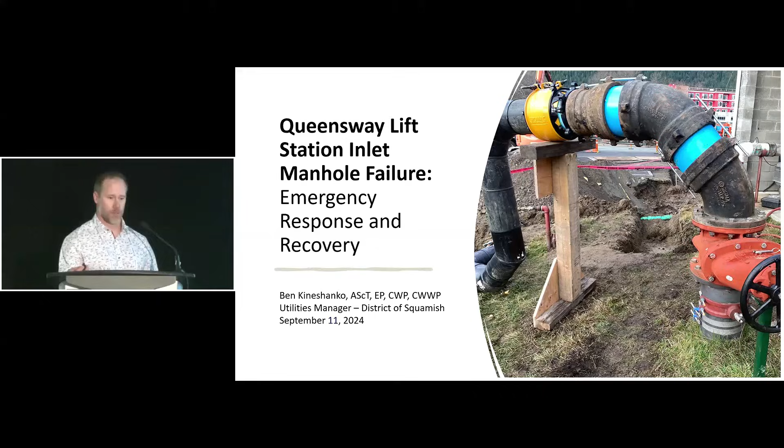So a little about my community first. The District of Squamish was built on forestry. Historically, Woodfibre pulp and paper was one of the major employers in town. It operated for 94 years. And during its heyday, whole families lived, worked, and were partially educated on site. I've met people in town that were actually born at the Woodfibre site. When it closed, there was pretty severe economic depression in the 80s, 90s, and early 2000s, owing to the boom and bust nature of forestry. And the mill finally shut down in 2006.

Since the Olympics, Squamish has kind of been reborn as a world-class seaside mountain town, known worldwide as a destination adventure community. As such, the district's undergone significant growth in the past decade, and anybody who's driven to Whistler in the past 10 years should have noticed. And that's expected to continue. We're the subject of several up-and-coming high-profile developments, including the Woodfibre LNG facility that's just begun construction. There's also a resort proposed on Brohm Ridge, just below Diamond Head. That one's kind of up in the air now, but it's been hanging out there for a lot of years. And then a new one lately is a Capilano suspension bridge style attraction, actually quite near our water source.

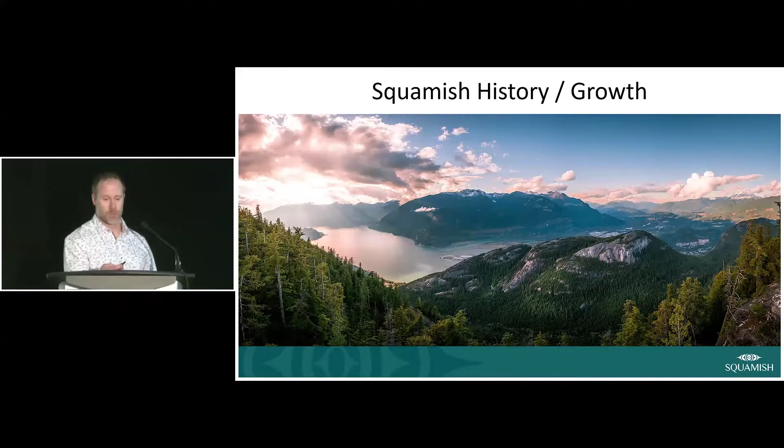And then additionally, there's actually a housing development and landlocked surf resort proposed, and I believe approved, for Britannia Beach as well. So as with many other communities in the province, growth is straining the capacity of our aging infrastructure. We didn't have a lot of money the last 50 years to invest in infrastructure renewal, so it's really starting to show, in my opinion. In this case, we were the victim of severe H2S corrosion and rapid community growth, creating a perfect storm.

So a little bit more about Squamish. In 2023, we were around 25,000. It really depends who you ask, and I find the stats are changing year to year. I'd say we're anywhere between 25 and 30,000 now, based on illegal suites and people living out of vans and everything else that goes on in town. We're a Class 3 water supply and distribution facility, Class 3 wastewater collection. We've got 27 lift stations, so one per probably 1,000 people, which is pretty high numbers in my estimation. It's a lot of infrastructure to maintain. It's owing to the fact that the community is really spread out and quite flat in certain areas, despite the fact that we've got mountains all around us.

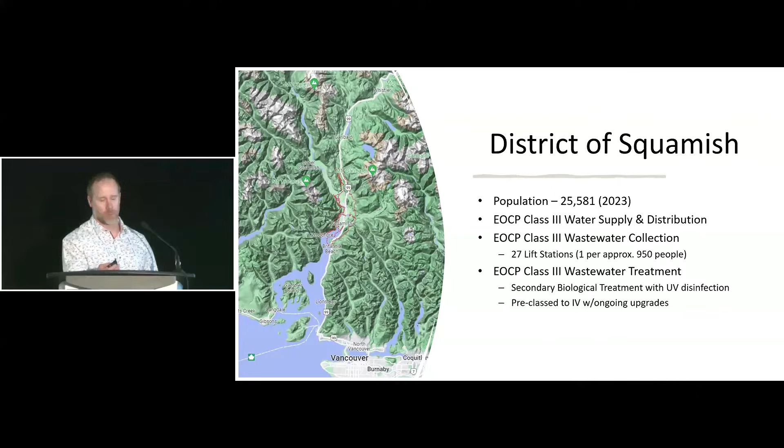And then we're a Class 3 EOCP treatment facility, secondary biological treatment with UV disinfection. We have an ongoing $20 million upgrade right now to add a circular new combined treatment unit and turn some old tanks into primary clarifiers. So we will be a Class 4 facility probably in another year or two. So another challenge to overcome.

Speaking a little bit about the Queensway lift station, it's the largest lift station in the district. All of the flow from the Valleycliffe area and then everything south of the Mamquam River, including downtown Squamish, flows either to the central lift station to be pumped to Queensway or to Queensway directly by gravity.

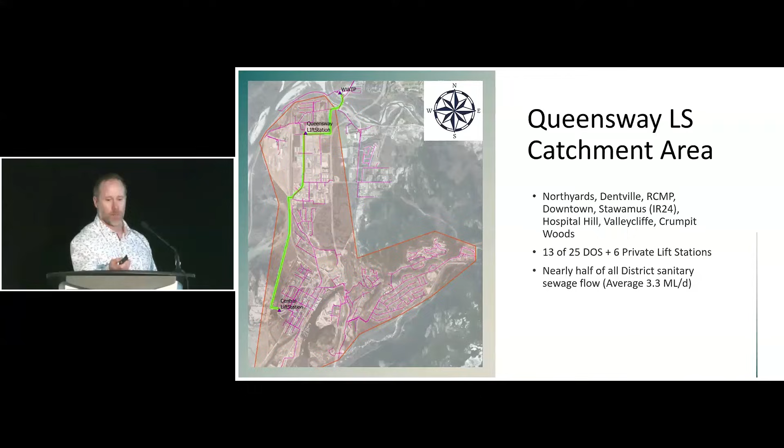So approximately a third to a half of our average dry weather flow flows through this system. And this manhole, it was kind of the linchpin to it all. So it was a single 1050 concrete unlined manhole receiving force main flow and gravity flow right before it entered the lift station.

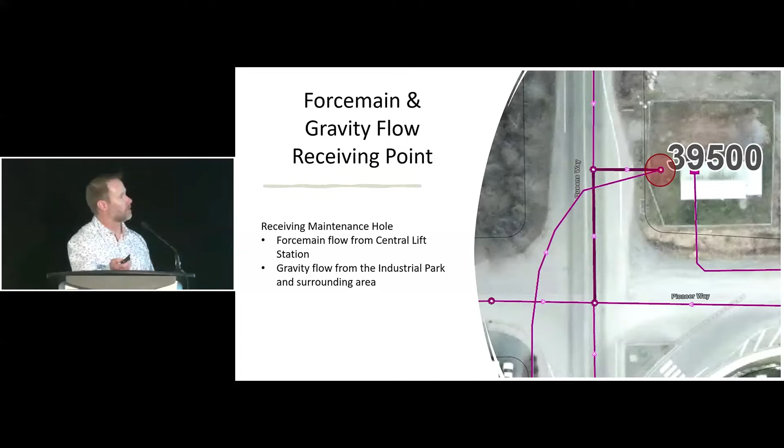And I think it was one of those things where we had an old treatment plant downtown. It was decommissioned, and the easy solution was to pipe it north. So they plugged a HDPE force main into an existing manhole without doing any further upgrades to save cost. And that was done in 2006. So in a period of less than 20 years, we saw a significant failure because of that.

A little bit of background, we kind of tweaked that there might be a problem in 2016. We did an odor audit on the community. We kind of looked at all of our lift stations, our wastewater treatment plant, where odor impacts were, and it was through an organization called Odotech. I think they've since changed names, but they were the ones that kind of educated us and informed us that we had H2S problems in certain areas.

After that came a sanitary master plan, and out of that master plan, a lift station condition assessment report that identified quite a few issues around our collection system, Queensway being one of the major lift stations that it called out. And then, as we all know, we had a pandemic in there. And there were a lot of impacts, and I think we're still feeling the effects of supply chain delays, human resource challenges, all that fun stuff, and then the cost increases that went along with it. And then in 2021, kind of during the pandemic, we were working on replacement and repair design and construction plans for that lift station.

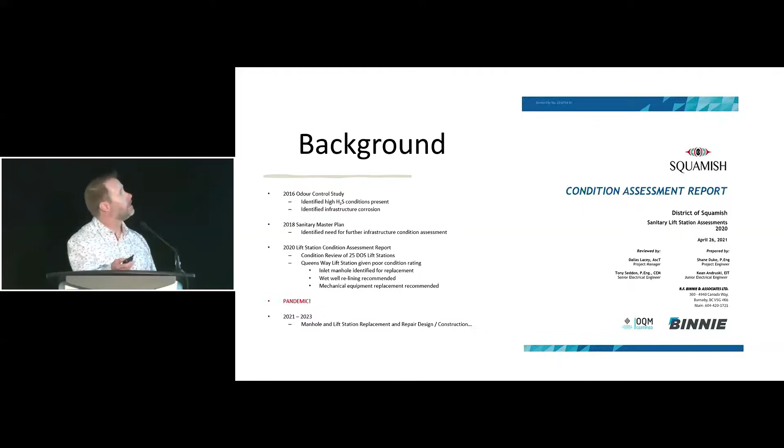Just another little bit on the timeline. So a tender went out in 2021, and it had to be canceled because the tender results we got back during that time when inflation was going crazy were double what we budgeted. So it was rebudgeted for the following year, put out, had to be canceled for the same reason. The cost to do the project doubled twice in 2 years. So we thought we had it licked, and then we didn't.

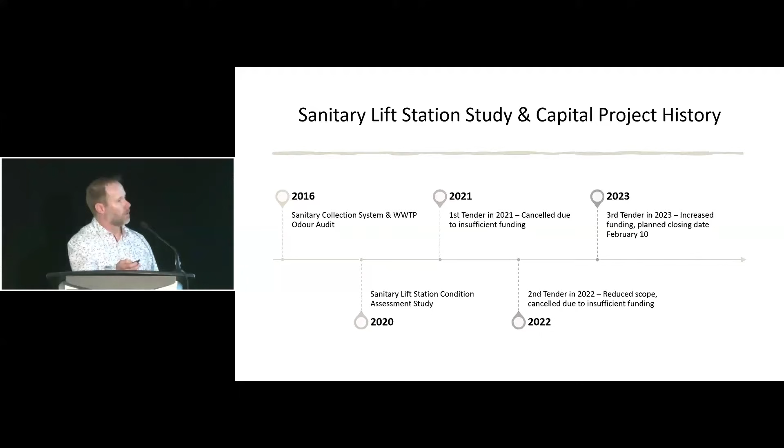And then in 2023, it was tendered a third time with increased funding, and the closing date, just keep an eye on that date, was February 10th. We would have been signing a contractor on to do some replacement and upgrade works. But on January 9th, this happened. So it was a Saturday morning, and I got a call from our utility supervisor saying, oh, there's a sinkhole. What do you mean there's a sinkhole? Well, this is what we found.

So we immediately engaged a geotechnical engineer to help us keep crews safe, working around the ever-changing conditions, because it was kind of sloughing as time went. Obviously, we've got a large part of the community's flow going through this manhole with no bypass. So we just kind of had to keep on keeping on. Immediately, we had kind of hoped to be able to fill the holes that were created.

Essentially, what happened is at the bottom of the 6-meter deep manhole, the bottom couple rings started failing. So basically, everything outside of that manhole, the debris, the sand, the cobbles started flowing into our waste stream. And because the groundwater table was really high, it was liquefied soil. So it was flowing rather than ravelling or rolling. So we immediately started plans to install an emergency bypass.

We went about finding and organizing 4 different contractors to install the appropriate piping, valving, hot taps, and to do the vacuum and tanker shuttles that we knew would be needed from downtown so that we could basically shut down long enough to install the bypass. Key goals were to keep staff safe, support the manhole, slow down or stop the leak, prevent complete failure, and construct a temporary bypass in case it did fail.

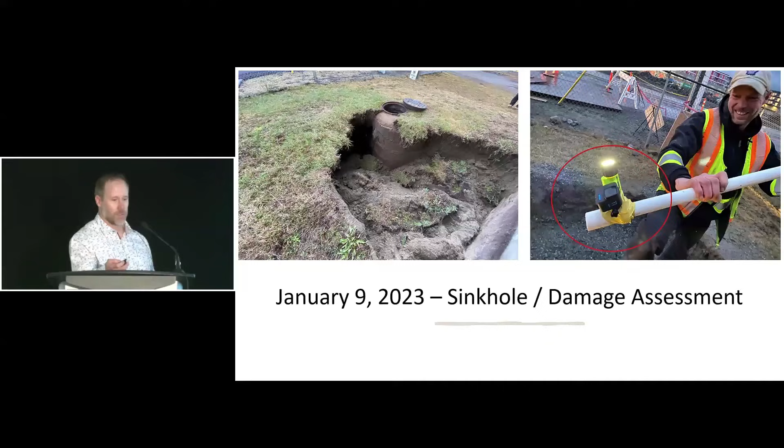In the one picture there, we've got one of our operators holding, we didn't have a camera that we could turn and rotate, so we came up with a Bluetooth GoPro and a Pelican light strapped to a PVC pole as an investigative tool. So then, where are we here? Bypass preparation and planning, right? So we did our locates, our BC One Call, had our hot tap and bypass contractors lined up. We recruited an engineering firm to model what kind of flows we would get through a temporary bypass, so we knew if we could handle wet weather events.

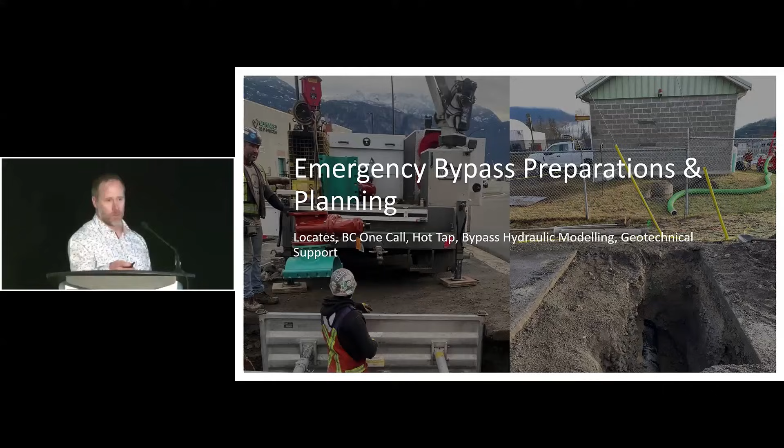And we were all set to go for the evening of January 14th to do this work, hoping to avoid further issues. And then this is what we woke up to the morning of January 14th. So the manhole collapsed catastrophically. The sinkhole got much larger almost immediately.

This is a text from our chief operator, who happened to be getting on a flight to Mexico that morning. His words of wisdom were, you have 3 hours, referencing the time we had to respond and come up with a solution before all of downtown Squamish was fully surcharged with sewage, a very flat, shallow system that could impact thousands of residents. So we didn't have a whole lot of time to respond.

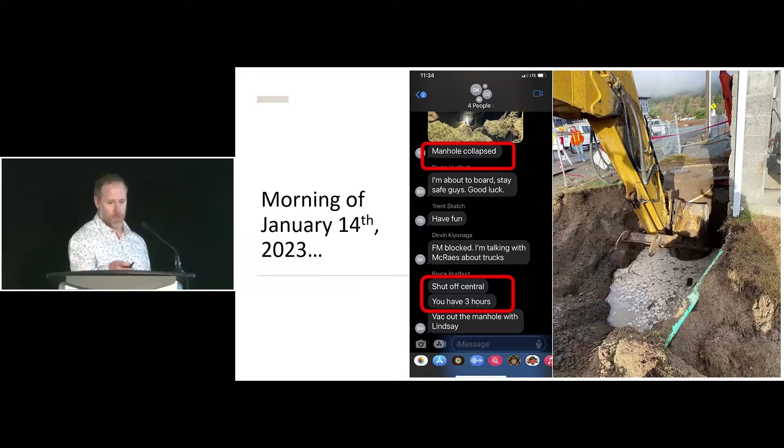The photo here is the excavator bucket being used to prop up the manhole to keep it from falling over entirely.

By the evening, this is what it looked like. The manhole did ultimately fail, about 14 hours before we were scheduled to install an emergency bypass. Truckloads of liquefied sand and gravel flowed into the lift station. We were still amazingly able to convey flow through the open ditch into the lift station and onto the wastewater treatment plant for a short period of time. Of course, it happened during the highest flow period of the day, as you'd expect, and all of downtown was effectively cut off from the wastewater treatment plant.

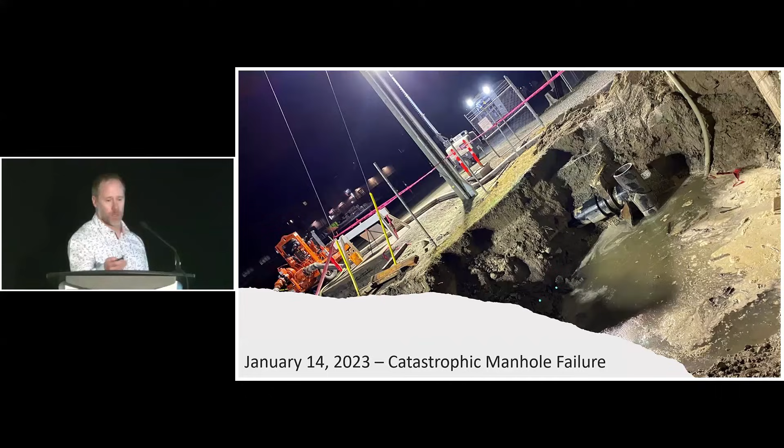The photo here illustrates the groundwater level at the lift station at the time, well above where the inlet to the wet well is.

Some examples of impacted downstream infrastructure: these are our fine screens at the plant. You can see, next to my millwright friend, some pretty bent up lamellas on those fine screens. Then you've got a picture of the impeller from Queensway lift station, and a photo of the grit and gravel built up in our grit separators at the wastewater treatment plant. It flowed through the lift station pumps, through the force main, right into our influent gallery at the wastewater treatment plant.

That's our largest lift station, we have four 60 horsepower pumps there, and they all got banged up pretty good.

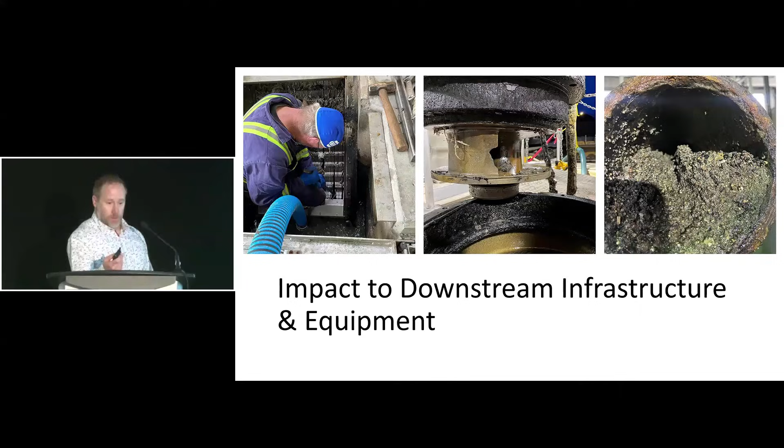So we went into emergency response mode right away. Myself and our Director of Public Works served as incident commander. We had to designate three sites to manage: our lift station downtown, the site where the failure happened, and the wastewater treatment plant. Main priorities for the response were to gain situational awareness, work safely, mobilize staff and contractors to reestablish conveyance and treatment capacity, and manage traffic impacts through the industrial park.

On the plus side, all of our contractors were already scheduled for later that day to respond and build the bypass, and we had a lot of the pre-planning work done for that. One unfortunate thing was, because they were due to work all night, they had stayed up late the night before and were sleeping. So most of them had to be dragged out of bed to respond earlier so we could get started, and they were starting on no sleep.

We called out basically all of the public works staff, including former staff members who were still casuals with us. Some came from Metro Vancouver, some from Whistler, as well as our engineering, environment, communications, emergency management, and senior leadership team. We had lots of help from local contractors. As I said in my presentation to council, we were borrowing and stealing from local contractors, and then I was corrected that we weren't stealing. Council called me on that.

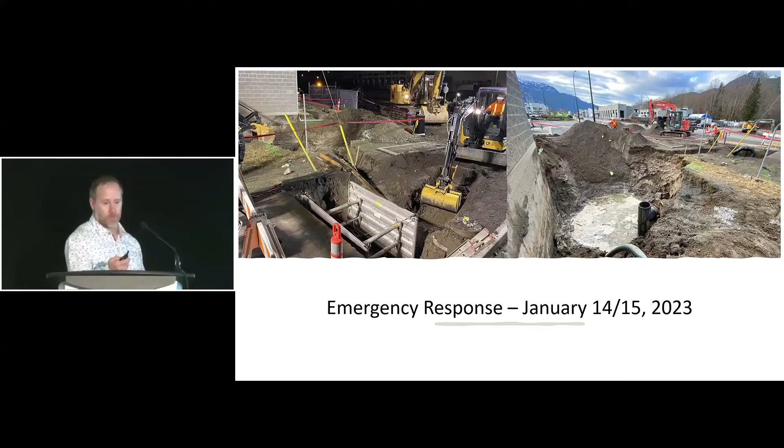The comms team was critical, communicating to the community, dealing with regular situation reports in the field and with contractors every few hours, and sharing contact information. Unfortunately, because of the surcharging downtown, we did have to spill to the environment for about 6 hours before the vacuum trucks could get there and start shuttling flows. We were actually able, because we had a bypass port installed at the central lift station for pump bypassing and pigging, to use the station pumps to discharge to the environment, for better or worse.

If we hadn't done that, literally thousands of homes would have been full of sewage downtown. We did flood a parking garage and one residence, partially I believe. Spill reporting was initiated, and ultimately, I'll skip that.

When the vacuum trucks finally got there, they had to work through the night. In total, we had 11 trucks running nonstop for over 16 hours while we were building the temporary bypass to convey wastewater out of that catchment to the wastewater treatment plant. This was right in the middle of a residential area, so you had trucks running flat out all night, and we had almost no complaints. It was shocking.

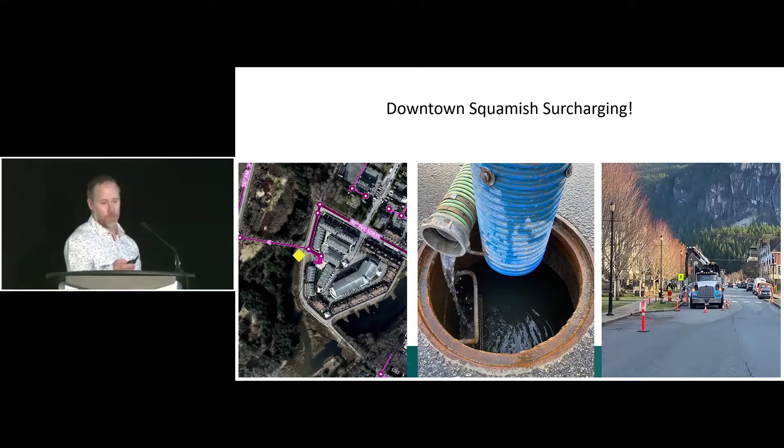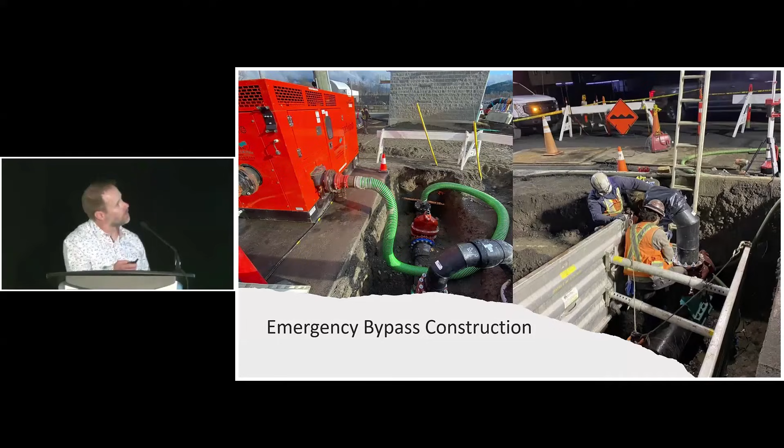In the span of about 24 hours, two bypass systems were installed at the lift station. One for gravity flows in the industrial park area, and then the other one, which is the thing of beauty on the right-hand side there, was what we put together to convey force main flows around the manhole and into an existing bypass port that we had at the lift station.

Obviously not designed for wet weather flow. This happened in January. Had we had big rains after this, we would have been in a world of hurt again, but luckily we had a pretty dry year that year.

Some of the issues obviously required regular staff involvement. For the gravity side of it, we were able to get pumps that came with a float system, and we were actually able to tie them into the hydro off of the building, so we didn't have to run diesel pumps nonstop. It took several weeks to get to that point, but it definitely helped reduce our rental and fuel costs and greenhouse gas emissions.

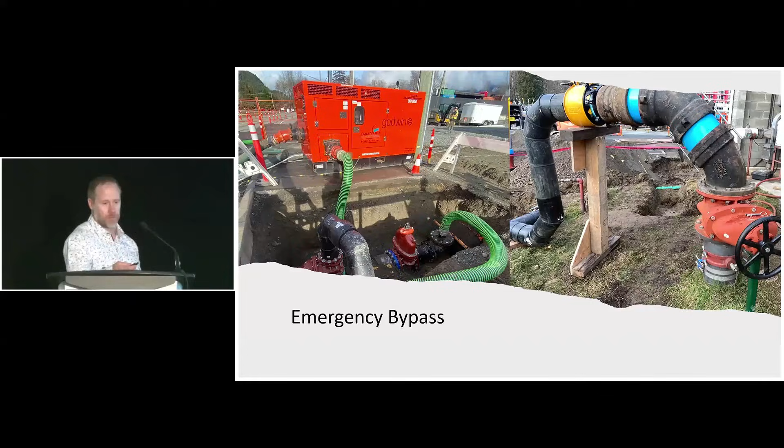Lots of innovative methods and materials were used in construction. I was very proud of staff for what they came up with for that bypass, and to do it in such a short period of time. I believe our director might have even been out there swinging the wrench. Don't tell anybody.

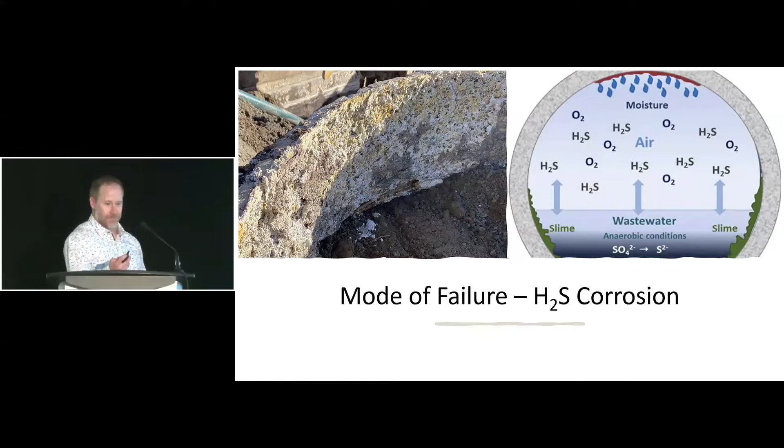Why did all of this happen? Some of you may know, some may not. Hydrogen sulfide production occurs in sewer systems in the absence of oxygen. Bacteria growing in the pipe walls consume oxygen preferentially. Once it's depleted, they switch their metabolic pathway and use sulfur in the form of sulfate or sulfide for respiration. This creates an environment where hydrogen sulfide and sulfuric acid are created as a byproduct of cell respiration.

That obviously attacks and corrodes concrete and metal. Concrete on the bottom of the manhole and below the water table corroded to the point where hydraulic pressure from the outside pushed through the concrete structure and allowed groundwater and sediment to enter.

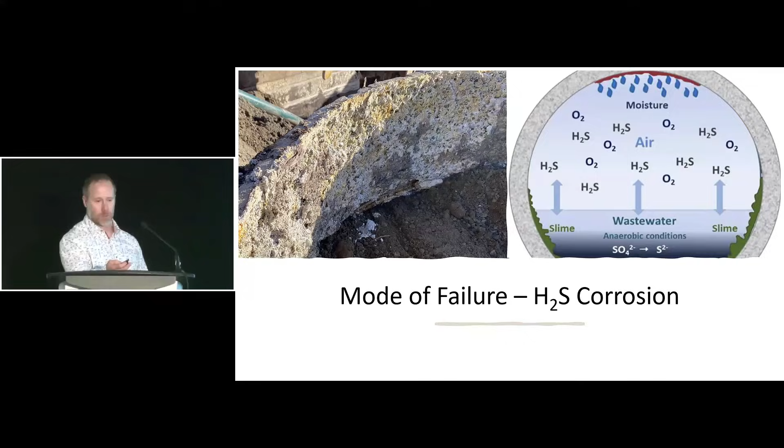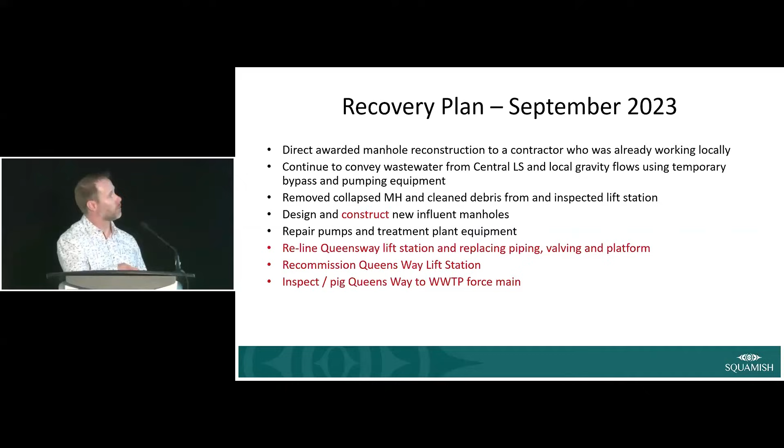Recovery plan - this was the slide I shared in September of last year. As of this time last year, we had designed new influent manholes based on work we had been doing that was in stream for the tender process. We actually ended up going through three engineering consultants before we finally completed the project. We had repaired pumps and treatment plant equipment, but we hadn't done any of the relining, recommissioning, or cleaning of the force main.

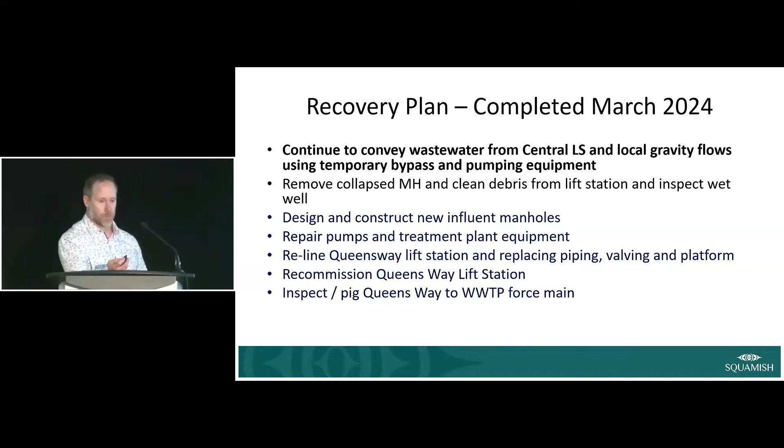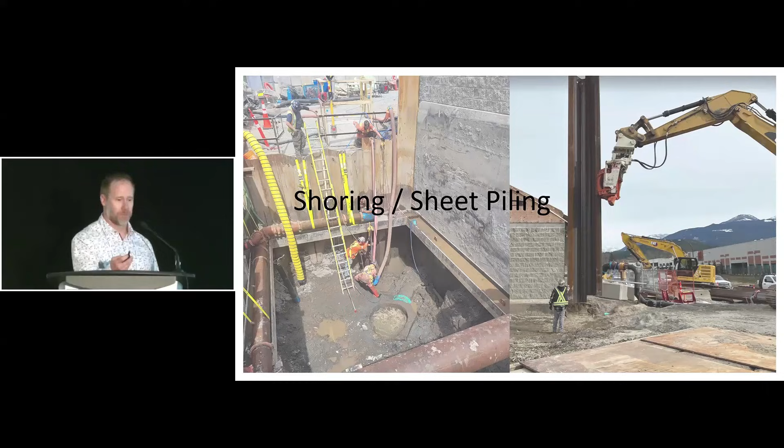And then obviously there's a dewatering setup there as well to keep the groundwater out. And what do you do with all that water? Even in dry weather, the downstream drainage ponds were backing up due to freshet in the Squamish River.

So we had to split flows to an alternate storm catchment. Lots of diesel pumping. There was a washout and failure of some improperly installed storm culverts downstream due to the sustained high flows. We had environmental consultants engaged to monitor ongoing water quality risk.

There were some real challenges because we found there was some iron in the groundwater that we were removing, and had to deal with that. Bi-weekly sampling at various points along the discharge paths, and obviously notifications to the Ministry of Environment and DFO. Through significant investigation, it was determined that the discharge was not deleterious to the environment, but we had to jump through all those hurdles to prove that, right?

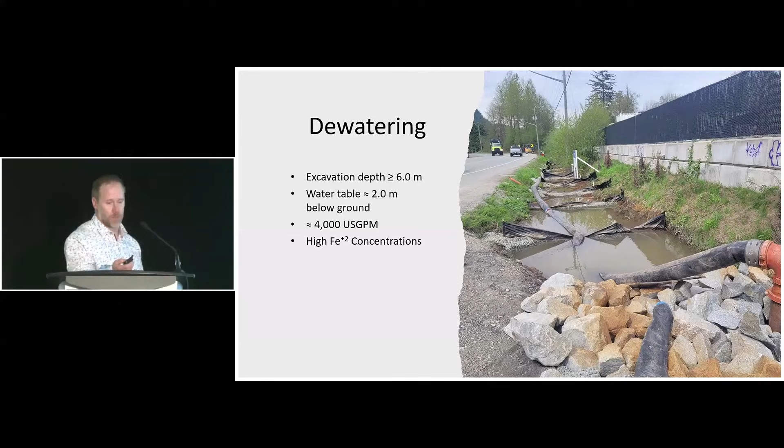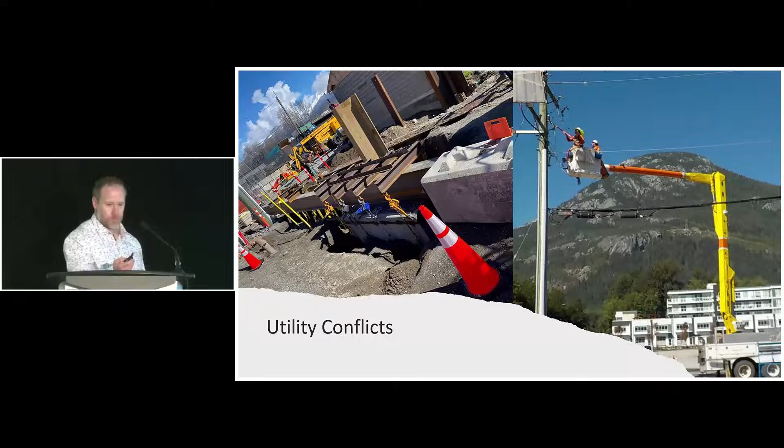Alternate measures, you had to do a 922 for this one, I think. The contractor was required to verify their isolation procedures because they had to make sure the wet well was isolated from the pumping bypass that we had set up.

So they had to add additional valving to make space for the work. We had to do a number of force main shutdowns, and I think in total we redid the bypass 3 times, or certain segments of it 3 times, just to deal with the alternative measures side of it.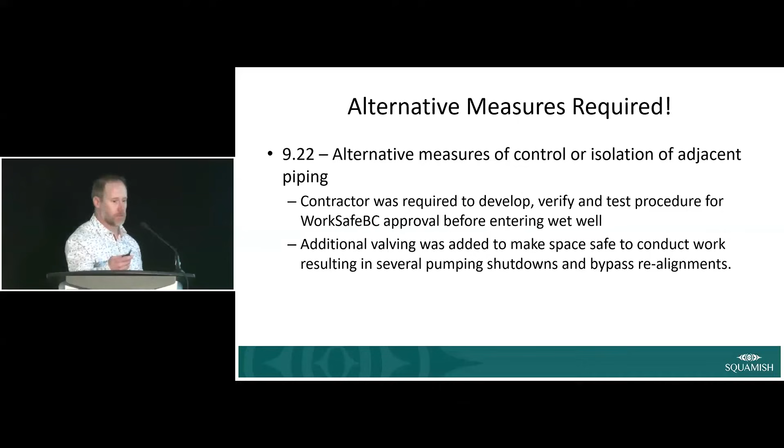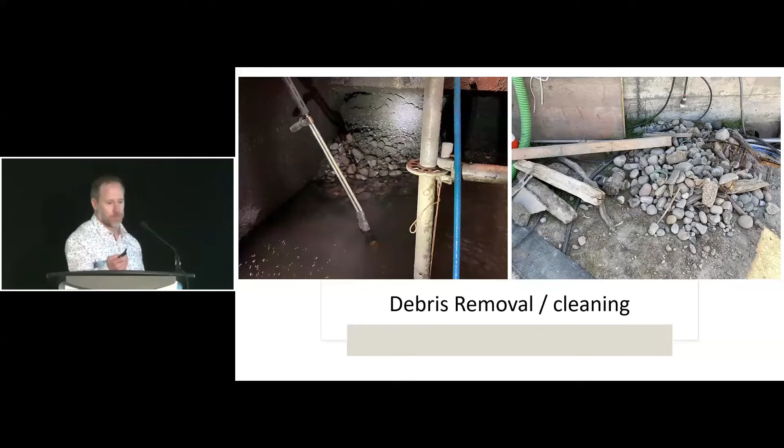This was some of the debris that was inside the lift station. You can see the large, football-sized cobbles that came into the wet well, and some of the debris that was removed. This is what we found inside of the wet well, which wasn't entirely unknown to us. We had done a condition assessment and sort of expected to see things, but once you get it all cleaned off, it always stands out a little bit more.

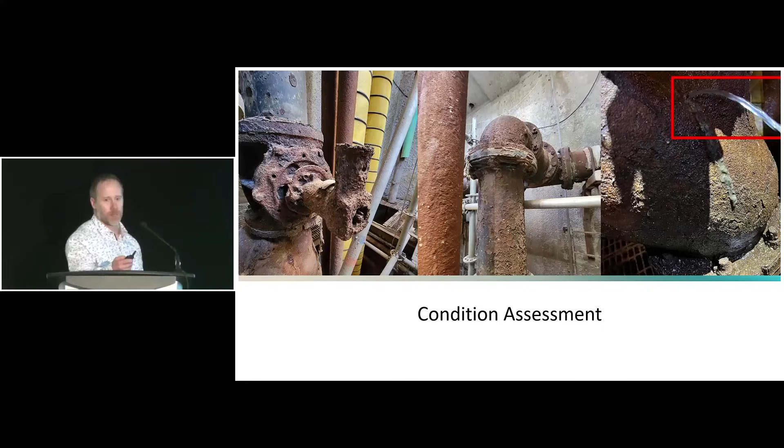Interestingly, on the top right corner there, that's a check valve body that had sprung a leak. It had a pinhole right through the check valve body.

But it was quite stark, the contrast between the operating water level, the areas that were completely submerged most of the time versus what was exposed to air. You could see where that hydrogen sulfide gas was contacting water droplets on the wall of the lift station and degrading the concrete.

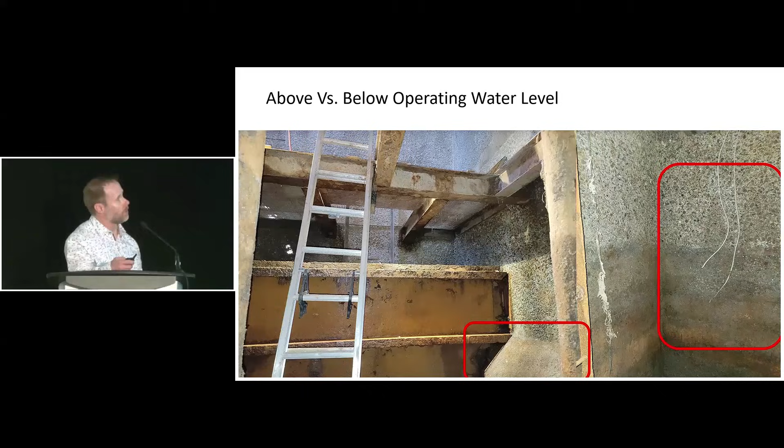Some photos of the exposed rebar. The concrete had degraded far enough to expose rebar.

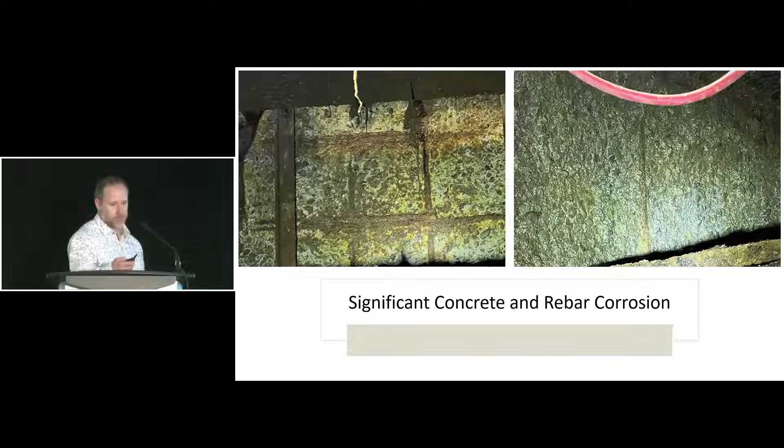Next steps: restoration and relining. Obviously we had to remove all of the H2S impacted concrete. They had actually done core samples previously, so we kind of knew how far back we would have to go to get to good concrete before it could be rebuilt.

They had to protect the concrete and rebar, regrout the lost material, and then we went with a liner called a stray cat liner. We looked at FRP panels and/or just leaving it concrete, and we wound up with a spray-on, paint-on PVC infused liner just to save some cost.

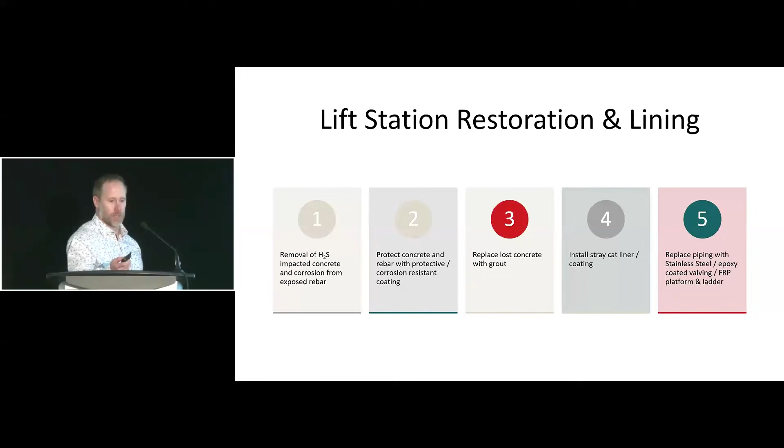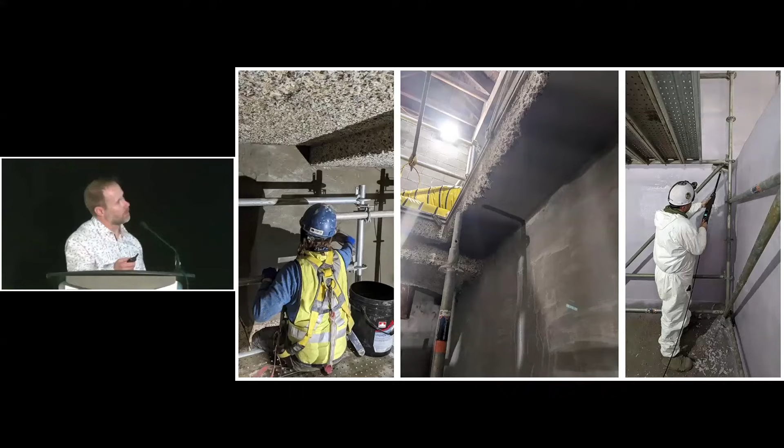And then obviously replacing piping with stainless steel, epoxy, FRP, anything that won't be corroded by H2S. That's a photo of some of the recoating of rebar, working on regrouting and installing that PVC infused liner.

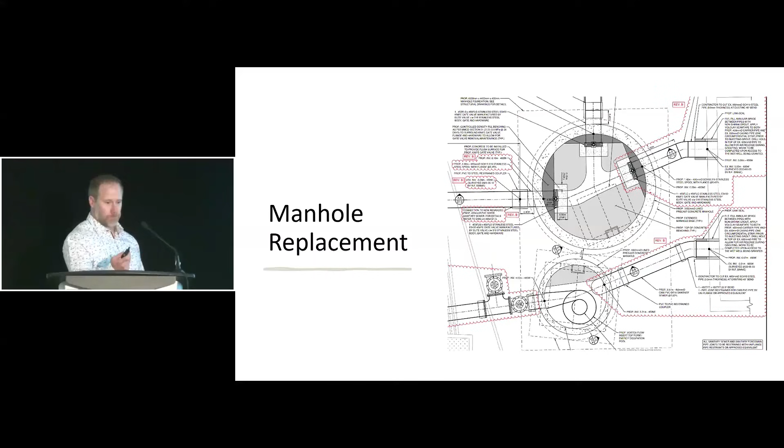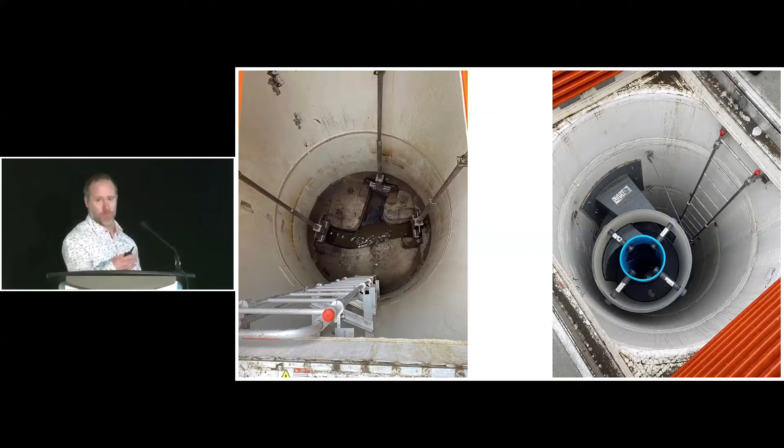And there was a vortex that we put inside the force main manhole. The idea with this, I believe, is to strip H2S from the liquid as it comes into the station. One of the challenges we're finding now is there's actually much higher concentrations of H2S gas within that manhole. It's not making it into the lift station, so in theory it's doing its job, but I'm curious to see how well that PVC liner holds up over time.

And we installed some gate valves in the gravity manhole just to give us some flexibility for future upgrades if needed, so we kind of took the opportunity there.

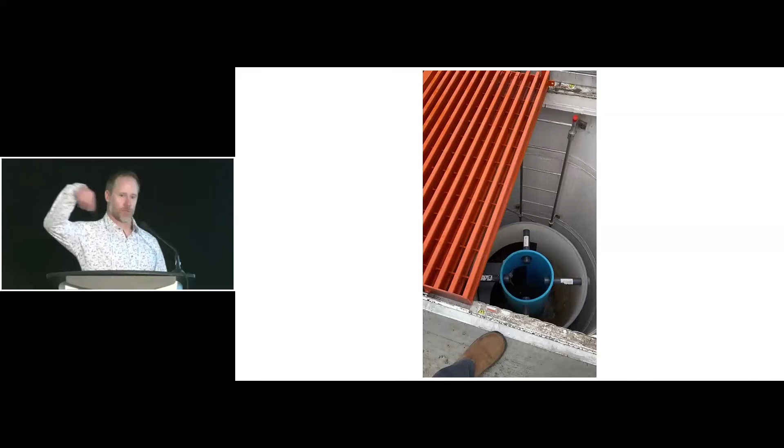It spirals around that structure at the top and then drops down a tube inside, and there's a bell at the bottom that allows it to flow off in a more laminar manner.

And service was restored to the station 14 months later. The complete failure happened on the 14th of January 2023, and we put it back into service on March 22nd of this year.

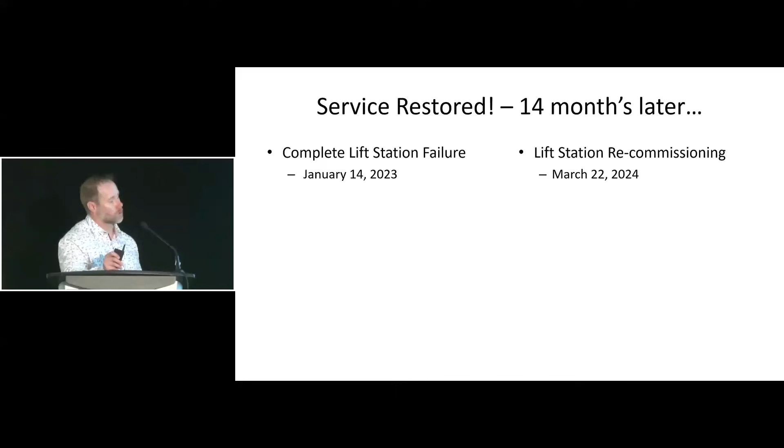Total response and recovery cost was $6.15 million. On the response side, our 2022 and 2023 budgets for this station combined are about $100,000, and our 2022-2023 actuals were more like $500,000, so that's a $423,000 variance there that we had to account for.

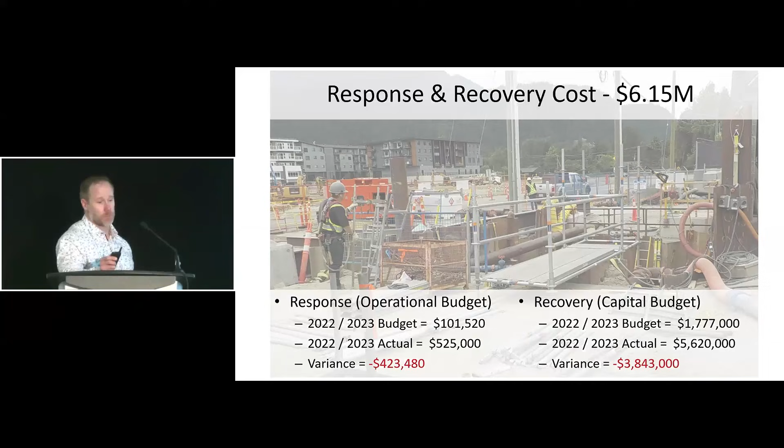And then on the capital side, the original tendered budget was $1.7 million, and the actual cost ended up being $5.62 million to restore that station. So again, another $3.8 million that our engineering department had to come up with and our finance department had to come up with to cover those costs.

So some of the lessons learned: when your operators bring concerns to you, it behooves you to pay attention. Don't underestimate the impact of H2S corrosion. I know there's a lot of places in Metro and the bigger cities that have long force mains that experience similar issues. Conduct regular condition assessments of your infrastructure, not just lift stations.

Everything you own should be looked at on some 5 or 10 year recurrence period, just to see how it's holding up. And then accurate budgeting and costs. We missed the mark on our budgeting on the capital side, miserably. That was during a pandemic and there were lots of other things going on, but we failed to see how much of an impact it was going to make to our financials.

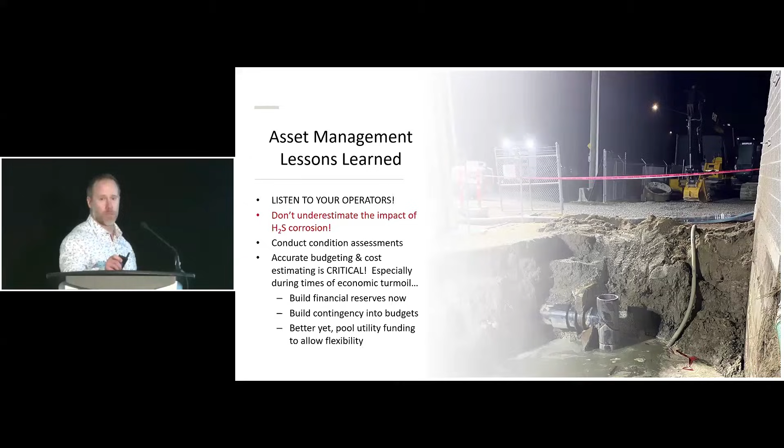One of the things I really try to impress upon our financial people is to make sure you're putting away money into reserves and building contingency into our budgets. Our engineering department has been pooling their capital funding. So instead of having individual capital project-based budgets, like this money for this lift station, this money for force main, this money for gravity main, they just have one big capital budget for the year. If one project's hitting roadblocks and another is making headway but the costs are more than you expect, you can funnel that money without having to go back to council for approval.

Understand your system, obviously talk to operators. Scrutinize public complaints. If people are complaining about odor in an area, go and find out why. Is it the estuary that you're next to, or is it something going on with your lift station? We've started implementing H2S monitoring in our SCADA system so that we can see live trending, what's going on in the system, and identify areas where corrosion is happening and plan to mitigate sooner than later.

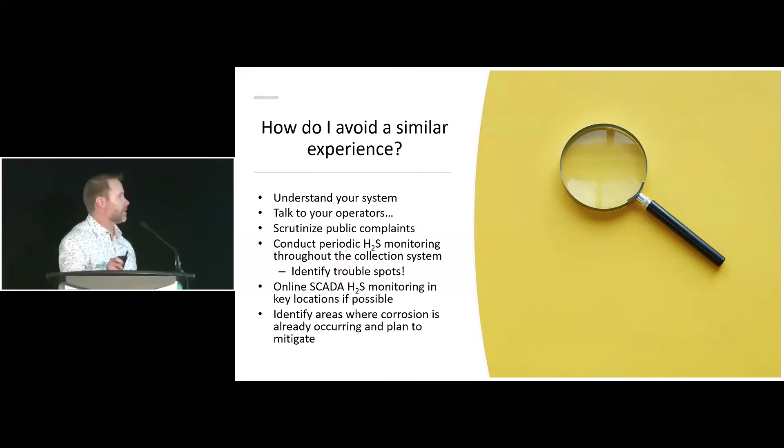I see Natasha's giving me the 5-minute warning and I want to leave time for questions.

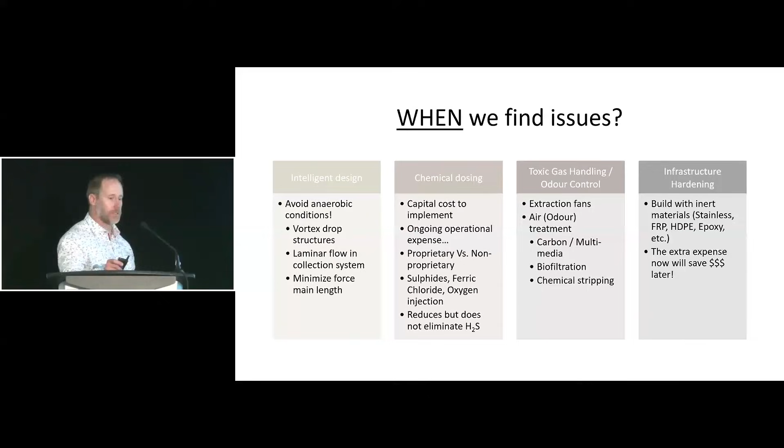So we talked a little bit about drop structures. Chemical dosing is one of our next things to pursue, to try to reduce concentrations of H2S that are making it to that lift station and then through to the plant. You can use extraction fans and odor control processes. Again, they're costly and require maintenance. But I think most importantly is build these structures to withstand H2S and acid. Use PVC and FRP and all these things that we learned burn and cause other problems, but it helps protect your infrastructure from major failure.

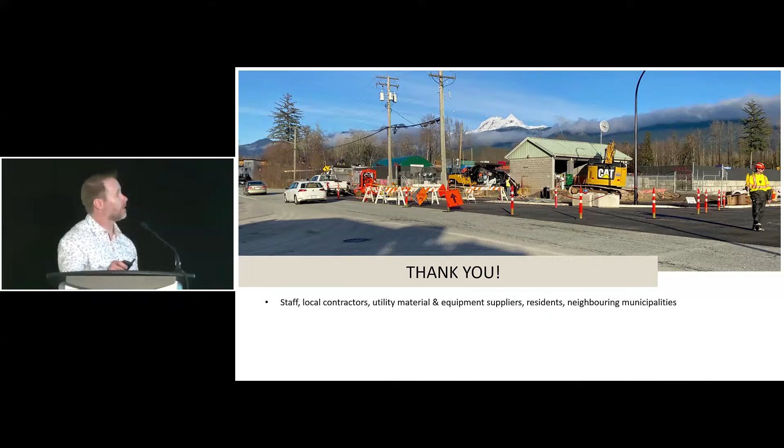And that's it. Thank you. We had so much support from our staff, local contractors, our suppliers. Flocor rushed parts to us, no questions asked. Our residents were very understanding, thankfully, and neighboring municipalities helped out as well. Are there any questions?

So we do have one question from the online operators. First of all, he says, fantastic job, Ben, and great work to all your operators during this time. What H2S monitors are you using for SCADA application? Boy, I don't know off the top of my head. I talked to a gentleman at the trade show yesterday that our chief operator has been dealing with. I think it was Procon. It's essentially an element that can be put in the environment and connected to SCADA that'll give you a readout. The one thing about those elements is that they only last up to 2 years, depending on the concentration of H2S.

And there's another set of data loggers that we've used often called OdaLogs. They're a portable battery-operated data logger that you can drop into really any space to record H2S levels. They're handy because you can take them throughout your system, drop them in, bring them back to the office, and download the data. Any other questions in the room? None online?